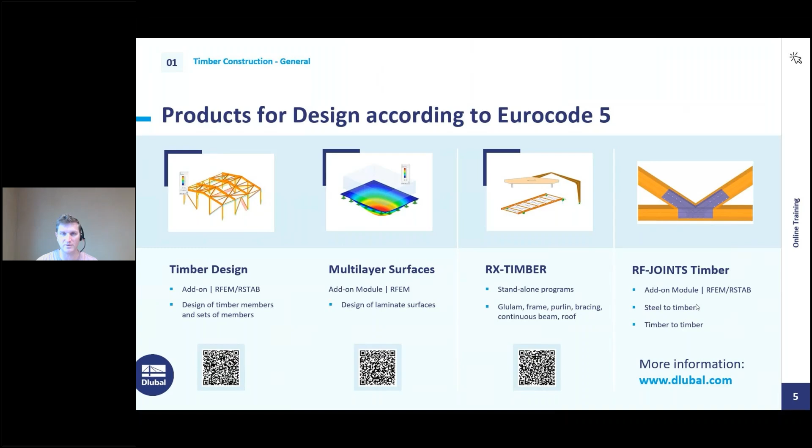And this dowel type connection with steel plates to timber beams, which is available in RFEM 5 only. We try to implement a new philosophy in RFEM 6, which is not available yet, but we are working on it.

Okay, then we can switch over to RFEM 6 and start with our first example. A few words about the presentation: I do not recommend modeling directly, but just watching and then repeating what was shown with the recording, which you will receive afterward in an email. This training actually requires the RFEM 6 student training. If you have not seen it yet, you can watch it later on our website. We will not go into the theory of timber design today; that would go beyond the time frame, and I will leave that to your professors.

Then you see the new model base data dialog. That means we will enter a model name, in this case example 1. We choose the type of model. You can select the 3D type for this example or the 2D XZ plane stress type, which would also work. I'm used to keeping it as 3D, so that's why I select 3D.

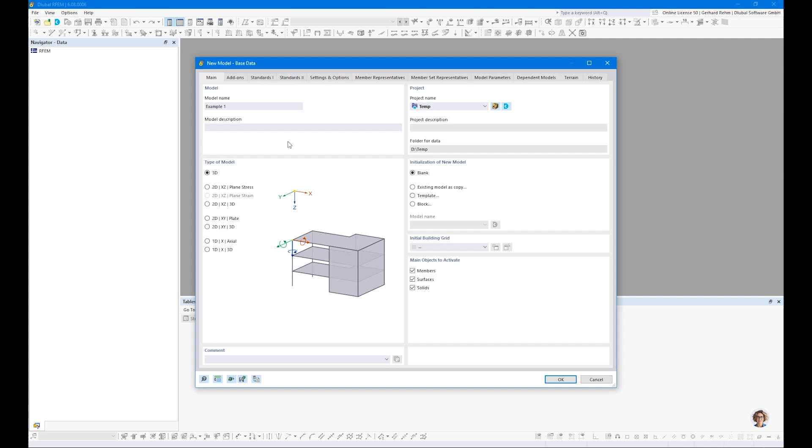Then we go to the add-on tab. Here we can activate the timber design add-on. Here on the bottom you will see the multi-layer surfaces add-on, which was presented here. We do not need any load wizard, so I deactivated this option here. For wind and snow loads, we don't want to generate.

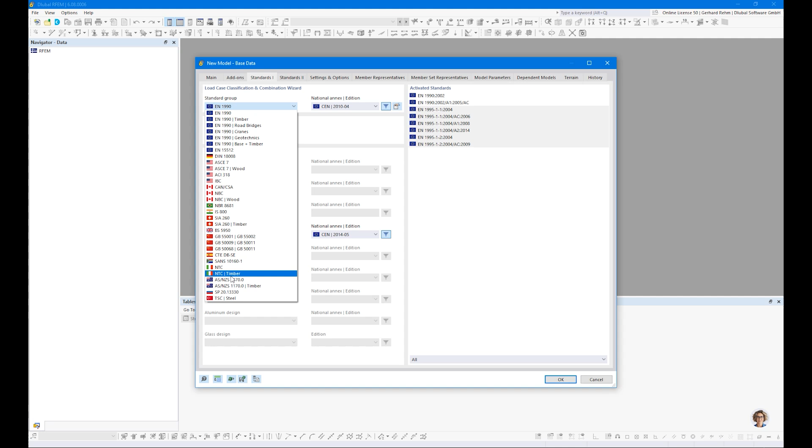Standard group should be changed to the timber-related standard group in this case to consider the correct serviceability limit state load combinations. As you know, we talk about load duration classes, so that's why we need to select always the additional timber standard group, for European standards or US standard, Canadian standard, Italian standard, Australian standard, exactly. So in this presentation I will use the global Eurocode, that's why I do not select any national annex here.

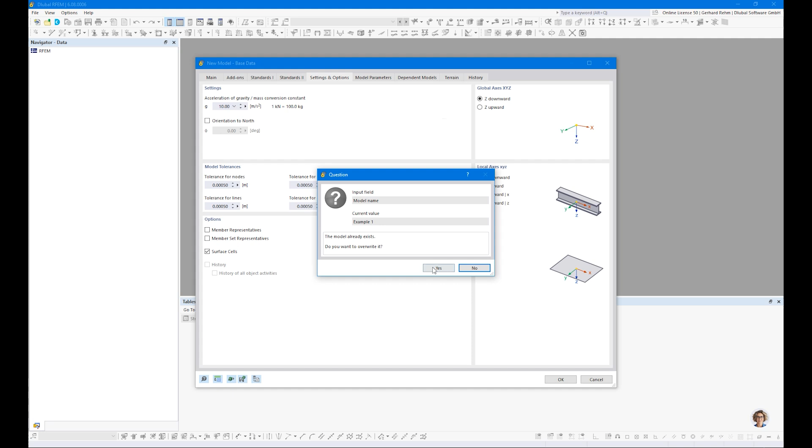Okay, so maybe we can deactivate the member representatives because we model only a few members, that's why we do not need it. Then let's start. You know about all the navigators and the icons, I guess, from this RFEM 6 student training, that's why I will not mention any further things about that. We start creating a new member. I use this icon here on top.

Each member needs a cross-section, so I will create a new cross-section. Maybe before I start, I will delete out all data to start exactly from scratch. So a new member, and we will load a new section from the library.

All these massive one sections can be designed according to Eurocode, SIA, and NTC. The composite sections, massive 2, is still in progress, so it's not available yet in RFEM 6, since we introduce a new philosophy to design composite sections. We do not want to use the gamma method described in Eurocode 5, which is really limited in its usage. We will use a different approach here, and we are working on it.

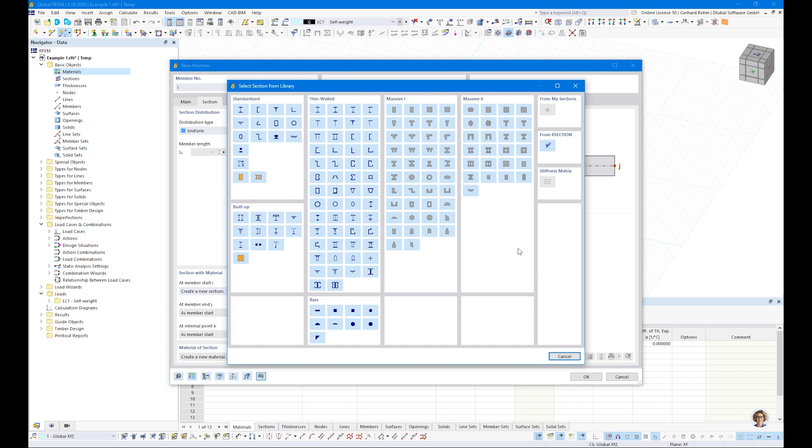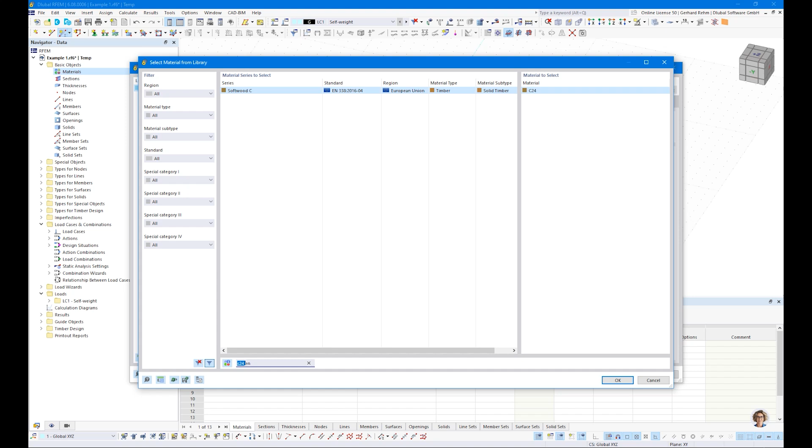Mostly we use our rectangular section. We need a material. We open the material library, and we can use these filters to find the correct material, or we can simply use the search. In this case, I want to use C24 according to European standard. I enter C24 space EN, and I get directly the material I'm looking for.

Okay, then let's go to the geometry. In this case, the width is 120 millimeters and the height is 200 millimeters. If you're interested, you can also check the section properties.

Now the beam is on the cursor. We can start, for example, here in the origin and use this black grid points. I see the unit is still in millimeter. We can change this, so I go to 3 meters, and the next one should be at 4,500 millimeters for the second span. We simply enter 4,500 millimeters and click the enter button, and that's it.

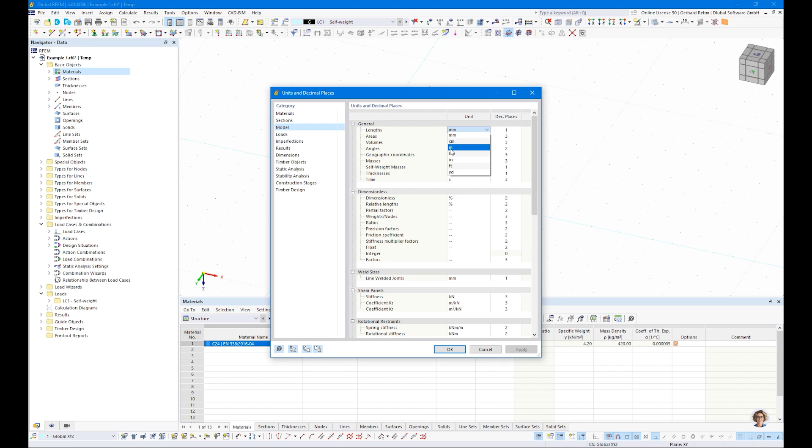Maybe let's switch the units. I changed it in a previous file, that's why it's set to millimeters. I want to use meters here.

So this is our rendered two-span beam. Of course, if you want to check the wireframe model, simply switch to wireframe. This is actually what we use for our analysis.

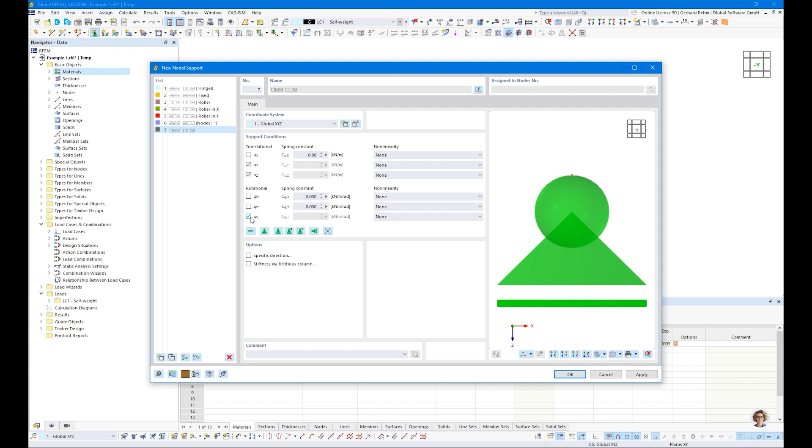So we have this two-span beam here with the beams. Now we add some supports. We will use a fixed hinge support on the left side, and a sliding support at the intermediate support. I create a new support which is sliding in X, and I will apply them on node number 2 and 3.

Okay, so that's it actually. We have already load case 1, which is created as default. This load case 1 considers automatically the self-weight of the beam with factor 1.0. In case you want to calculate some examples from university, mostly they do not calculate the self-weight separately, they add it into the member load directly. In this case, you can simply deactivate this checkbox. You see directly that this load case 1 self-weight is assigned to the action category permanent, that's why we use a load duration permanent here.

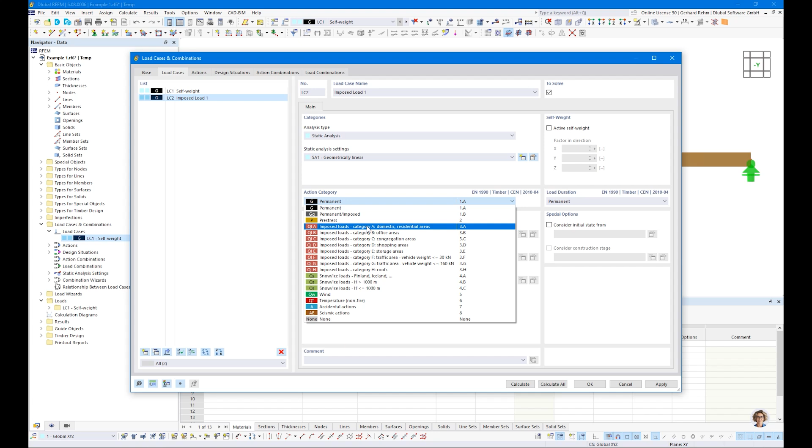We create another load case. In this case, it's imposed load 1 on span 1. The action category we will change to imposed loads category A, and you will see the load duration is changed accordingly. I will create a copy of this load case and change it from span 1 to span 2. That's only a description, you can use whatever you want.

Then let's fill our load cases with loads. In this example, I will add a new member load. Watch out, do not use the line load for members, this will not work, you need to use the member load. Of course, you can also add some nodal loads too, but for our case, we use the member loads. We will apply a member load of 2.5 kilonewton per meter. Click the member 1 and 2 and click OK, and then you will see that the load is created.

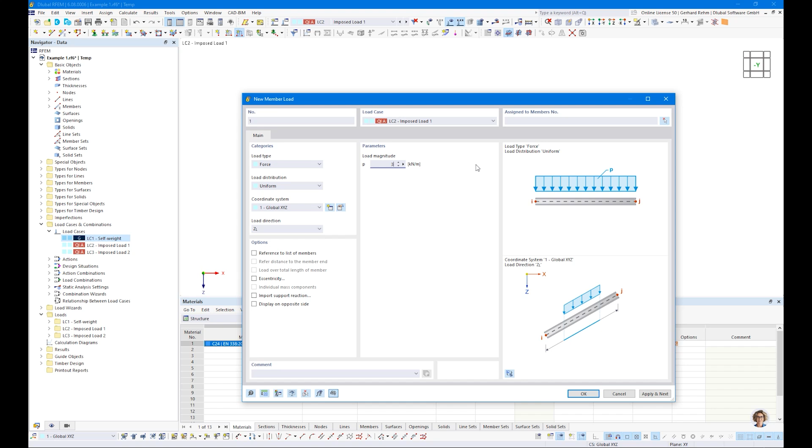Then let's switch over to the imposed load. In this case, we will use 3 kilonewton per meter on the left span, and also in load case 3 on the right span. So we need to check the imposed load separately, we cannot use one load case because the imposed load is a variable load which can act on left, on right, or both at the same time. For example, the biggest deflection we will receive from load case 3, but the biggest bending moment we will get from load case 2 and 3.

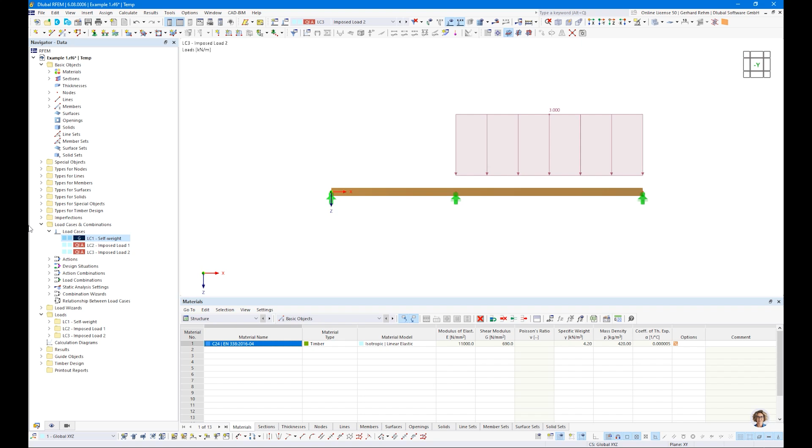So when we check our load combinations, we will see, or maybe we should go to the load cases and combinations dialog first. So we have created our load cases, then we will see what happens to our actions, especially important here for the imposed loads. When we check it, both load cases can act simultaneously.

In case we switch over to alternatively, then both load cases will not be combined. But of course, we want to consider all of them at the same time, meaning simultaneously.

Okay, then let's switch over to design situations. Here we can define which design situation we want to check. Of course, we want to check ULS, meaning permanent and transient. We want to check the characteristic deformation and the quasi-permanent deformation. So it depends on the national annex.

Okay, so what we can also do is change the combination wizard. In this case, the combination wizard is set to second order, but for our example, the geometrically linear analysis, so the first order is absolutely fine.

Okay, then let's check our action combinations. Here we can double check which combinations will be created, and the result are the load combinations. So load combination 1 is only 1.35 times load case 1. Load combination 2 is dead load and imposed load on the first span. Load combination 3 is dead load plus the self-weight dead load plus 1.5 load case 2 plus load case 3, and this one is load case 1 plus load case 3, and so on and so on.

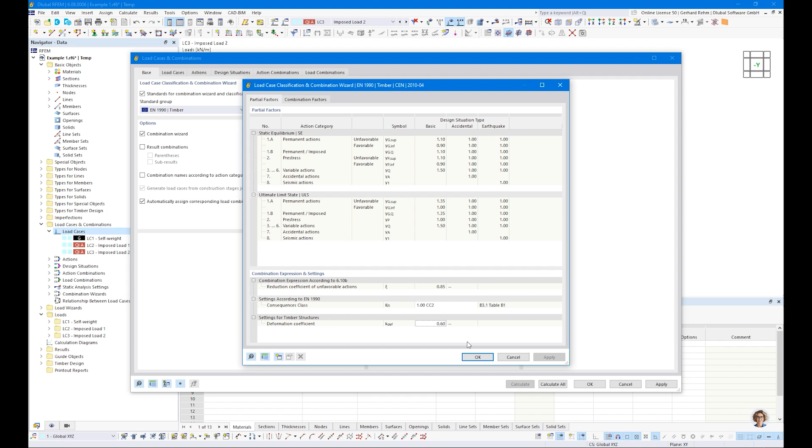So here you see the characteristic deformation with no partial safety factors, and the quasi-permanent combination, which includes also the psi values and the kdef value. The kdef value is described here in this added dialog for the load case classification, and here on the bottom you see which kdef value is used as default, 0.6. This is, I guess, for most national annexes the case, for softwood. Of course, if you have different service classes or different kdef values, you can enter or change the values here for this simplified method to consider creep.

Okay, so that's it actually so far. What we can do now is calculate the load cases and load combinations, so I do that for design situation 1. The design situations include all load combinations as an envelope. So what that means, we can check it here.

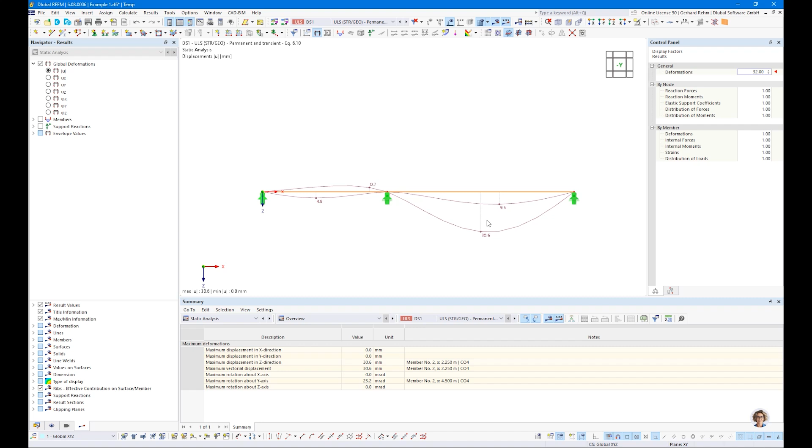So what we see in the beginning is the deformation, with the maximum and the minimum. That means, of course, the minimum deformation will come from that load only, from CO1. So when we check CO1... no, sorry, I guess from CO2 in this case, it's the 9.5 millimeter.

And the maximum one should come from load combination 4, I guess. Yes, so load on the right span. Same for the bending moment, internal forces, My. So the maximum bending moment, the 15.55 kilonewton meter, will definitely come from load combination 3. And that's the case. Okay.

I don't want to go in detail because this was shown at the RFEM 6 training. You receive your deformation, the internal forces, and the support reactions, so I don't want to go into detail for now. So what we do is we focus on timber design today.

That's why I switch over to the timber design add-on. Here I can define what I want to check. Yes, I will check ULS and both SLS checks, and of course, I want to design both beams. So that's the question now.

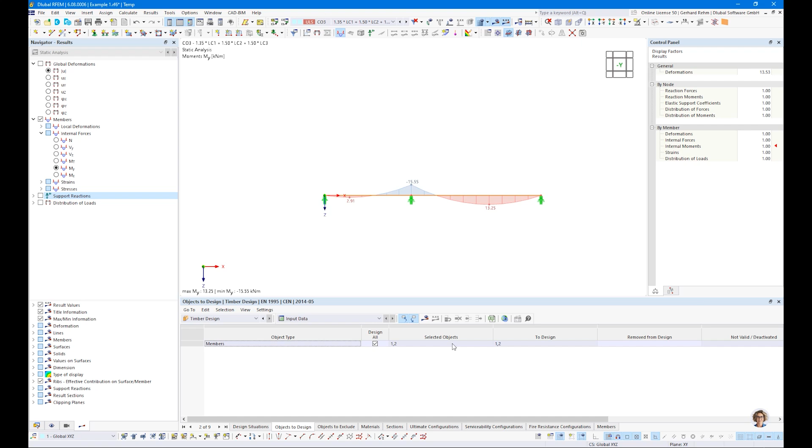Do we want to design the beams separately, or do we want to design it as one beam, one element actually? To do so, we can create a member set. So when we go to members, create member set, you see we can combine the different members to a member set.

And that means we do not design 2 members, but we can design 1 member set. Okay, I click OK. And when we check the member by right-click, member edit, or simply double-click the member, you will see that the design properties are now on the member. There are some additional tabs here because of the design settings. But when we don't want to design any member, simply create a member set and transfer the design properties to this member set. So when we click OK now and go back to the members, you see this member has lost its design property because the design property is assigned to the member set.

Okay, so let's go back to the member set.

And here we can define some additional settings. For example, we can define which service class should be used. We can define some local section reductions. We can define effective lengths, in this example for buckling, but since floor beams are mostly never forced to fail for stability, we do not check stability for this example. We will check stability in example 2 and 3.

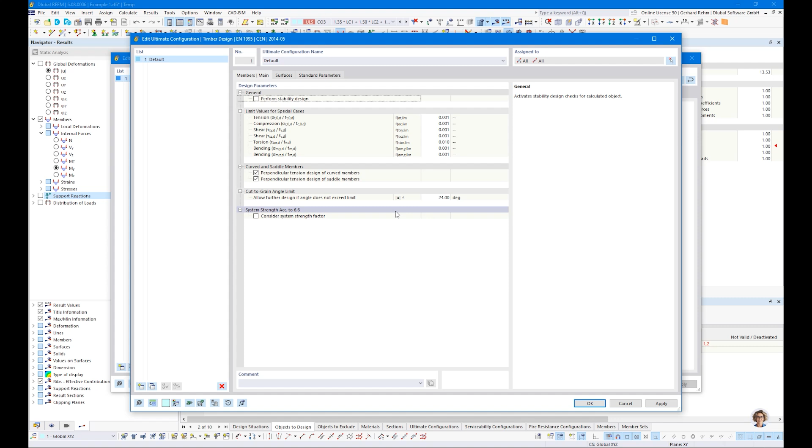Let's check the default setting for the ULS config. When we check it, okay, there is, for example, this option, perform stability design, yes or no. In this example, I do not want to get informed that I miss some input for stability, that's why I deactivate this setting, since I do not want to check it. Okay, there are some further settings for members and for surfaces, and also some standard parameters, which I don't want to mention today in detail.

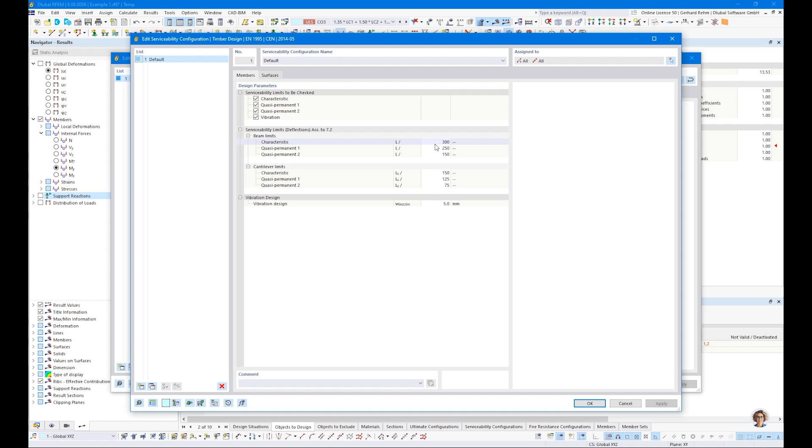Okay, when we check the SLS config, we will see our limits from the standard. It's also dependent on the national annex, of course, but it depends on you actually, so you can define your limits manually. Okay, then let's go to the last tab.

The last tab is about design supports and deflection. Since we do not design the members individually, so member 1 and 2, but the member set, we will see that the reference length for the SLS design is used for 7.50 meters.

Okay, so that means when we check now, when we would leave the setting as it is now, the program would check L over 300, for example, by 7.50 meters over 300. This is of course not correct. So what we need is the segment, the first segment, and the second segment. And how to consider this is by using design supports.

This is design support, so I will create one at member set start. This design support is for the design of pressure perpendicular to the grain, that's option 1, and for option 2 to create the segments for the serviceability design checks.

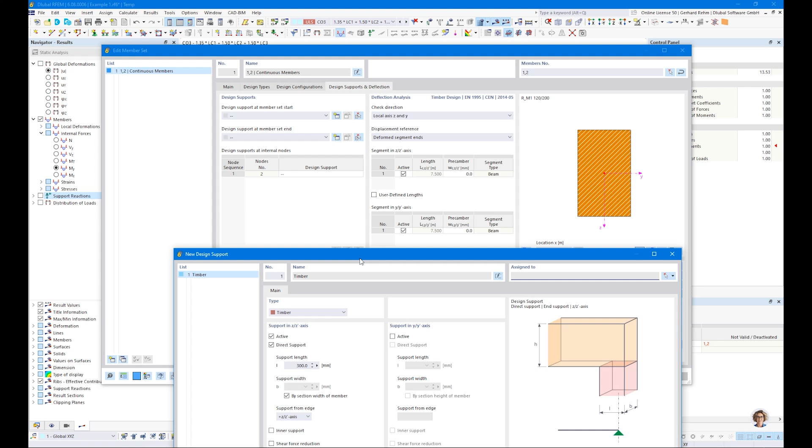Okay, so in this case, we want to consider the support in local Z-axis. So each element, let's go back and check the local axis system of the member. I right-click the member, local axis system of member. Each member has its own axis system, and in this case, we are focused on the Z-axis.

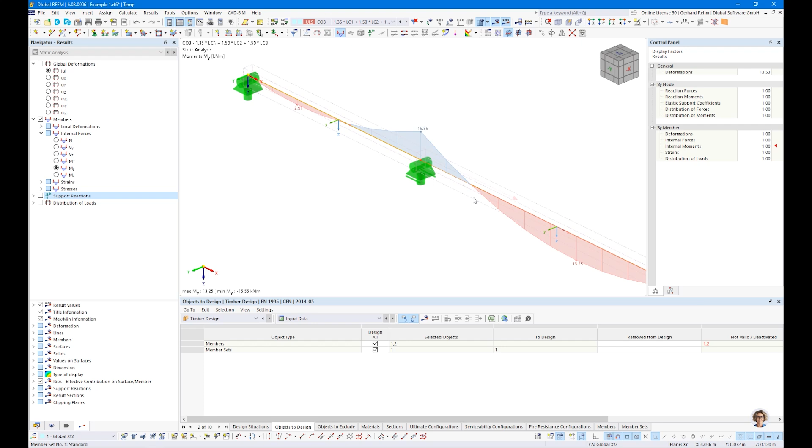So in this case, let's go back to this dialog, create a new design support. Okay, support length should be 60 millimeters here. It should act, or the width should be overtaken from the member. Support width in plus Z direction.

Of course, we can switch to minus Z direction too, but in this case, the Z-axis goes downwards. We want to apply the support at the bottom side. Okay, it's not an inner support, it's a support at the edge.

We could apply some shear force reduction, and we could also apply some reinforcement elements like fully threaded screws. Okay, so for the compression design perpendicular to the grain, we need to introduce this KC90 factor. For softwood and discrete support, we use this factor 1.5. So this is a user input.

We want to consider it for fire design. We don't do any fire design today, but we can leave it on. And yes, we want to consider it for the deflection check. Okay, so I assign this design support to the member start. You will see this icon here on the bottom, or the symbol, and also at member end. You will see the tables are still based on one segment, but now it automatically detects this intermediate node.

And what we will do is we create a new design support here. Length should be 140 millimeters. And in this case, it's an inner support. This information is important because it needs to know if there is the additional 30 millimeters available for the support pressure design check on both sides or only on one side.

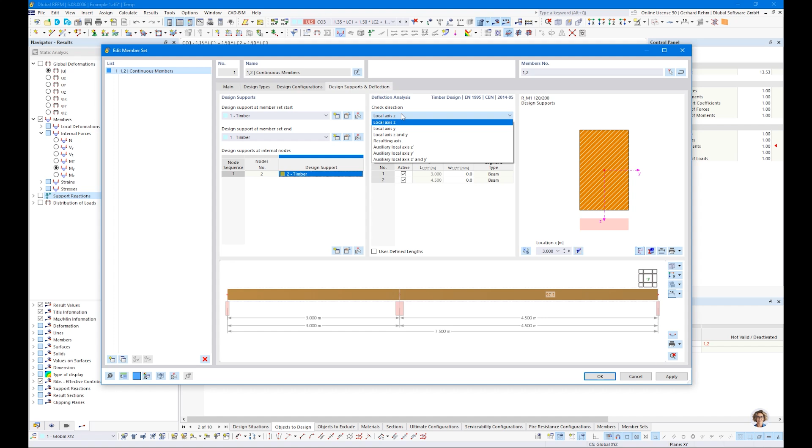Okay, and now you see the table has been changed. Now it detects two spans. One span is 3 meters, the other span 4.50 meters. Okay, so we can switch to local z-axis only because we have no deformation in y direction, but we can also leave it for z and y. It does not matter. Okay, so that's it for this tab.

Then let's go back to the design here on the bottom, for timber design, input data. As you see, member 1 and 2 get invalid because we do not have any design properties on them anymore. That's why we deactivated, and we want to check only member set 1.

Okay, so that's it for the input, and we can simply start the analysis.

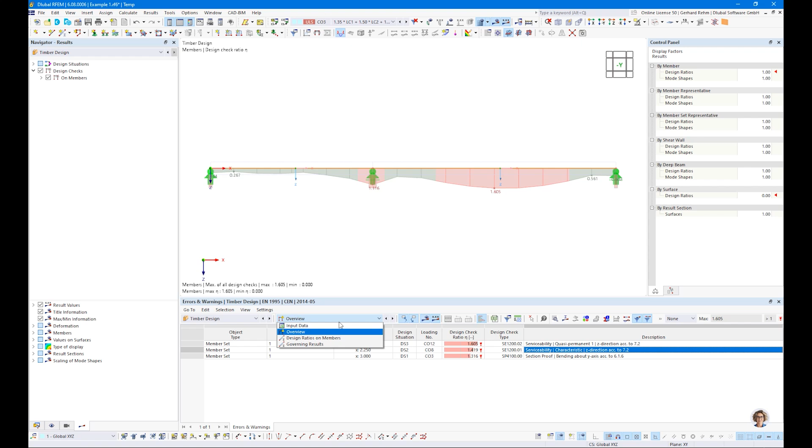So we can switch over to design ratios on members. Here we can see in detail what design checks are not fulfilled. So we have a few 0 values here. We can use this filter to show us everything which is higher than 0.

Okay, so shear is fulfilled. Sorry, not shear - the design of the support, meaning the compression perpendicular to the grain, is fulfilled. The shear is fulfilled, so we have no shear issue here, but bending is not fulfilled.

We can check this here in this table, or we can also check it graphically. Okay, we have different options. The first option is the default option, ratio envelope. It shows us the ratio envelope of all design values.

But we can also switch to selected design checks. In this case, maybe I want to deactivate serviceability. I want to see only the graphical representation of the ratio for ULS or only for SLS.

So here we can prove the plausibility. Yes, the ratio is affine to the deformation. That's fine so far.

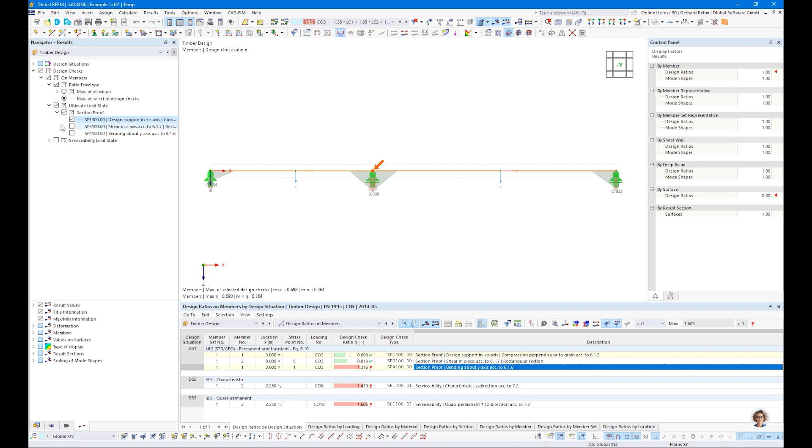Additionally, you can check the results for individual design checks. So for example, here, pure bending or pure shear or pure design support. This helps you to better evaluate the results.

But let's go back to the table results and to the details. In case you are interested in how the design check is done, you can simply double click this design check and you will see what is done here. It's nothing special since we do not check any stability.

We will check the stability later, and then we will see that all equations are listed here. So we do not have a kind of black box like other software. You see each intermediate value, and you will be able to follow your hand calculations with that.

Okay, so in this case, nothing special. We have our K mod dependent on the load. In this case, it's CO3, which of course has included imposed load and load case 1, dead load. That means the K mod value for medium term is 0.8 multiplied by our 24 Newton per square millimeter, divided by the partial safety factor, and you get the allowable stress. The stress divided by the allowable stress gives you the ratio.

That's actually all. But of course, what we can do now is we want to optimize this situation. There are two options to optimize it. You can simply add and change your cross section or your material manually here, or you can also optimize it here.

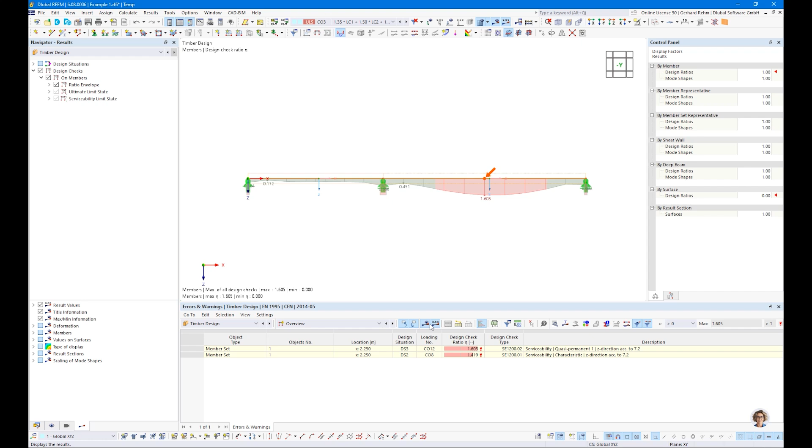So we go in 20 millimeter steps, and then the program tries to fulfill the design checks for ULS design only. Okay, so we see there are still red areas because this is for serviceability. So when we go back and switch to check only ULS, then you will see that the design check is fulfilled for this.

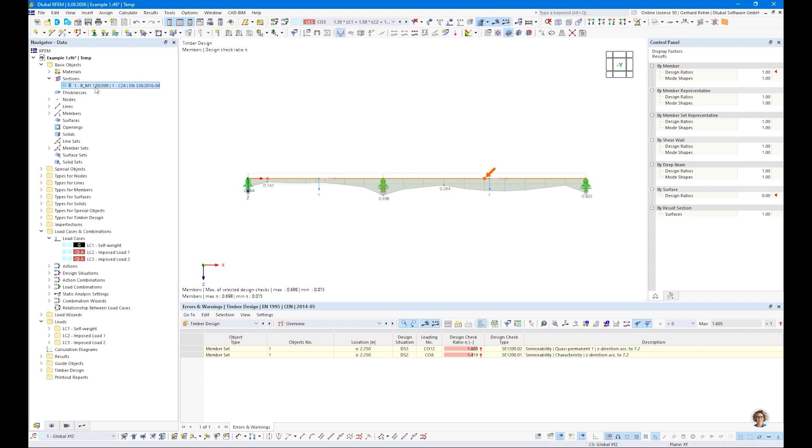Oh, sorry, no, I did a small mistake. Yeah, I realized. Sorry. The optimization - of course the ULS thing was fulfilled before, I guess. That's why we don't see any change here. The problem is only that we cannot optimize according to SLS.

120 by 300. No, sorry, it's all good. Let's check the design ratio. Yeah, it's good, it's good. Sorry. So when we check the design check again, it was optimized to 120 by 300 in this case. Okay, so I'm wondering why we cannot use 120 by 280 - it should also work. So I'm confused why it is not working.

Let's do it manually and double check again. Strange, it works with 280 as well. Let's try it again, maybe I have overseen something. Sorry for that. So we will optimize the height.

We will start with 200 millimeter and go to 300 millimeter in steps of 20 millimeters, so we have all the sections available for optimization. Now let's recalculate - sorry, that was my problem.

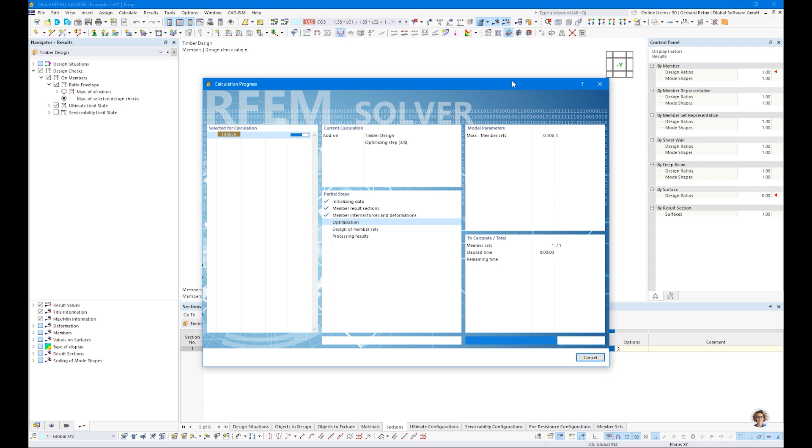We need to calculate the timber design add-on again. Sorry for that, small mistake. Okay, now we see the maximum ratio is 0.9.

And when we check the design ratio, and when we check the input data again, we will see that 120 by 240 is used. Yeah, so that's fine, it works as expected.

Sorry, I forgot to calculate the results again. Yeah, when we add the serviceability design check, we have - sorry, this one was 200 millimeters default. Sorry again. All right, let's calculate the timber design again.

Okay, so now we get the same result as before. We will see, okay, bending design check is not fulfilled.

We can go back to input data and say, okay, optimize from current row, optimize the height.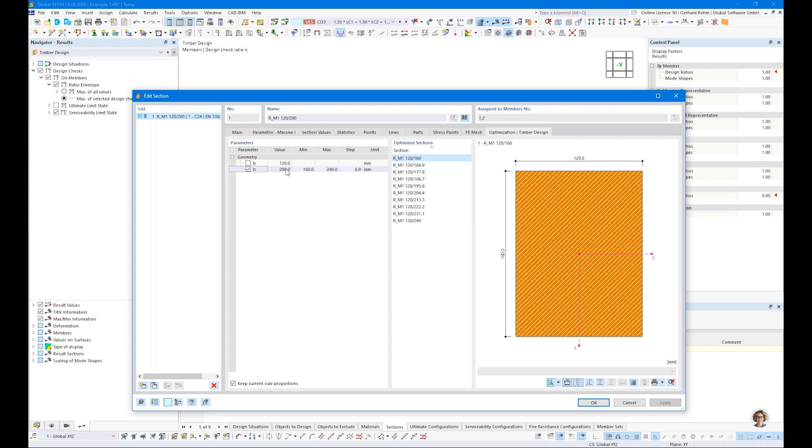We start by 200 and the maximum should be 300 in 20 millimeter steps. So that's it. Click OK, and then we can calculate the result again.

Now we see that the design ratio is now fulfilled for ULS, but not for SLS.

So what we need to do is we need to override this section. So simple right click, use all optimized sections in model.

Then we will see the section will be overwritten, and when we check it again, then we will see the real deformation with the real cross section. So this process has to be done manually.

Okay, so let's check max of all design checks. Perfect. Now we have optimized it, to 95% ratio, which is fine. Okay, so this is our first example.

Let's switch back to our PowerPoint slides, and we will continue with our second example, the flexural buckling.

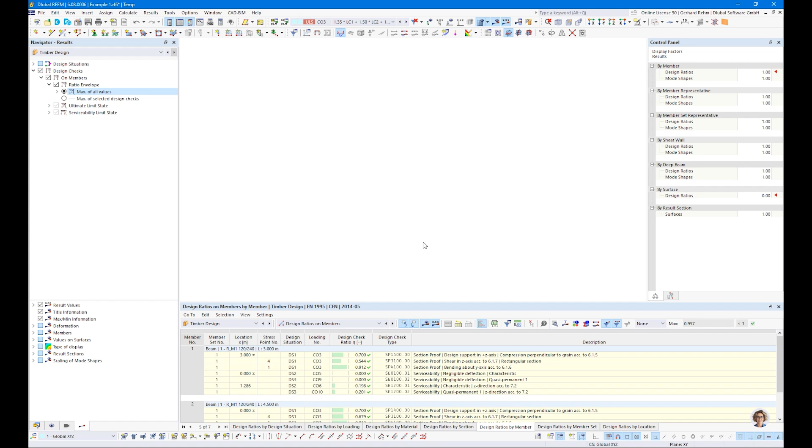Okay, I will create a new file here. So in this case, model name is example 2,

and add-ons we will activate. Again, the timber design add-on, we leave the standard, and we can deactivate the member representatives.

Okay, I will not go in detail like in the first example. So I will skip a few things and I will not mention all settings what I will do.

Or I will not describe in detail every setting what I will do. Okay, so let's switch again, standard group timber.

And now we talk about buckling design. So that means when we consider or when we use a column, of course, this column normally becomes high normal force.

And it can happen that it will happen that not the stress on the member is design giving or controlling, but this column can buckle out of the plane. Depends on the weak or strong axis, of course.

So for this example, we will use a column with a length of 8 meters. So section 120 by 240, this is fine so far. So the length is 4 meters and 4 meters.

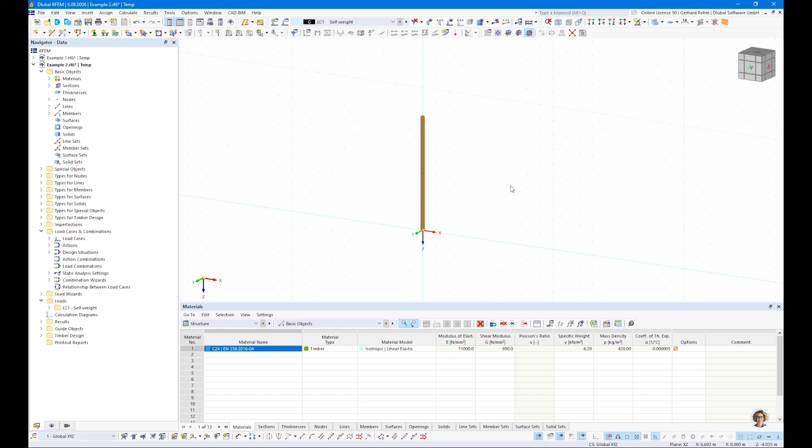We will have, so the we will have the weak axis, which is about Z-axis, and the strong axis, which is about Y-axis.

And about Y-axis, about the strong axis, we will have no restraint considered, and about Z-axis, we will have considered a

restraint here in Y direction.

Okay, so we need some supports on the bottom. Oops, sorry. On the bottom. And a support on top, on column head.

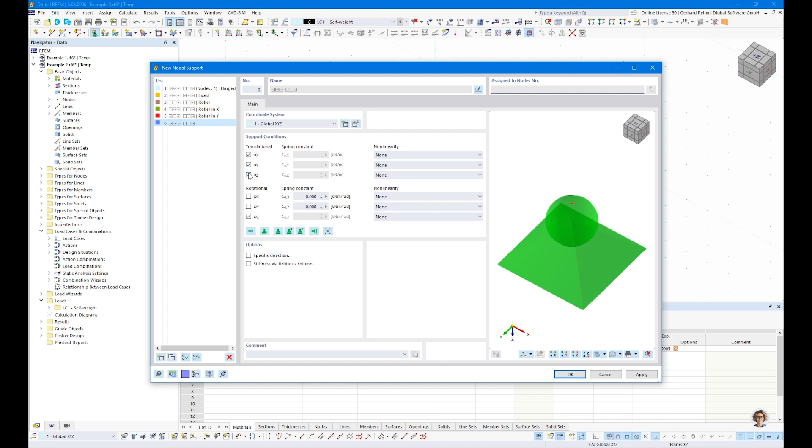So we should consider the support like this so that the normal force or the force can go into the beam.

Okay, here we go. So we will define some nodal load. I use the nodal load here, 35 kilonewton dead load.

Okay, and let's create a new load case for snow load, snow, and we will switch over to this category, smaller than 1000 meters, for example.

It detects short term as load duration, and when we check our load combinations, okay, let's go back to design situations. We do not want to check serviceability in this case, since we have only gravity loads.

We consider only ULS. That means, dead load and dead load plus snow, according to, in this case, first order analysis is okay, since we do only an equivalent member design.

So the Eurocode 5, for example, describes two methods, so the equivalent member design and an approach with second order analysis and imperfections, but we will not do this approach today.

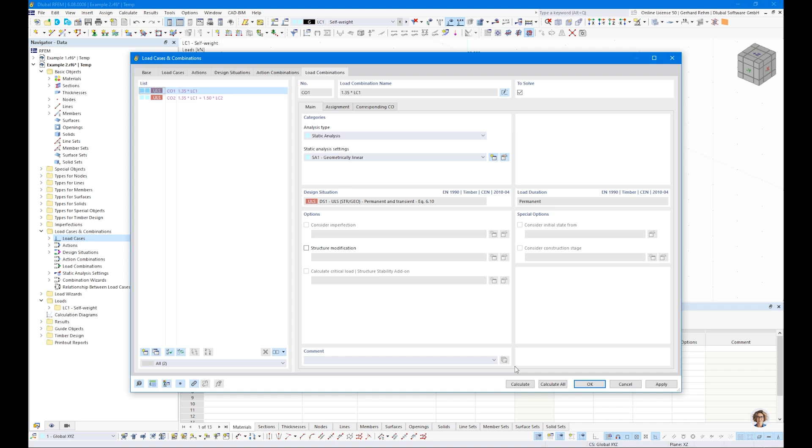We focus on the equivalent member design. Okay, that's actually it. We will fill load case 2 snow load, and we will apply 20 kilonewton of snow

load here on top. I guess I don't have to say anything about the

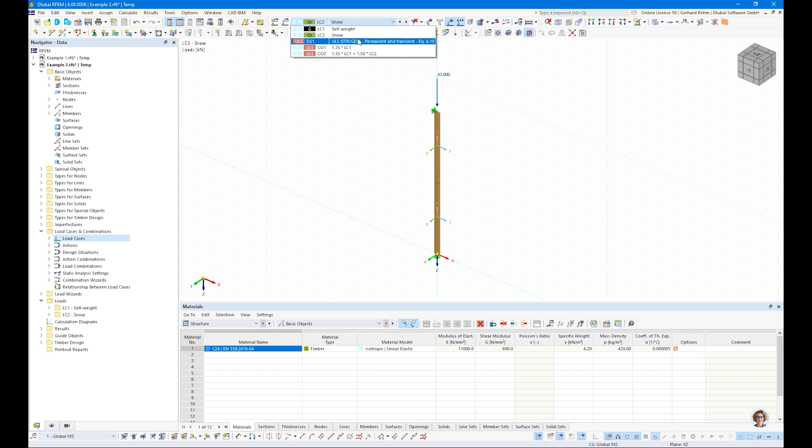results. It's clear. When we check our design situation, we will get the envelope of load case 1, load combination 1 and load combination 2.

So we are interested, of course, in the normal force. You see the top and bottom value differs a bit because of the self-weight of the beam.

So when we go to timber design now and click the calculate button, you will get informed that no effective lengths are assigned and the stability design could not be performed. This is just a warning message. If you're fine with that, because you know this beam will not fail for buckling, you can ignore it. But in our case, it's clear this slender beam will definitely buckle out of plane, so we need to consider this fact.

So when we check the results, we get only one design check, which is a pure section proof, meaning force divided by the area divided by our strength. That's all, nothing special.

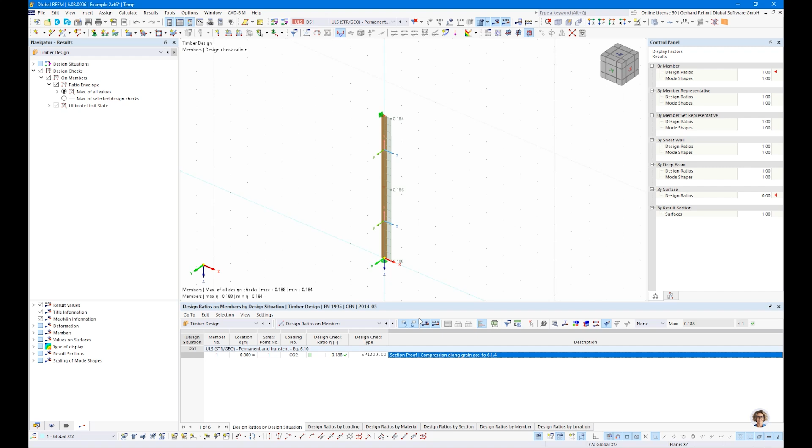But what we want to do is a stability design check according to the equivalent member method. In this case, again, we will create a member set, two members, create member set. We want to overtake the design properties again, and here we define design types. In this case, we need effective lengths.

Here in this tab, we say okay, we want to check flexural buckling about Y and Z axis. Lateral torsional buckling is not an issue - this will be in example number 3. You can leave it on or deactivate the checkbox, it doesn't matter since we have no bending moment on these beams.

Here it's about the effective length factor. In this case, it considers both buckling coefficients about both axes with factor 1.0. But as I said, I want to consider a lateral restraint in Y direction on node number 2. When we check the absolute values, it's 8 meters. For buckling about Y axis, we want to consider 8 meters as buckling length for this Euler case 2, but for buckling about Z axis, we want to consider only 4 meters.

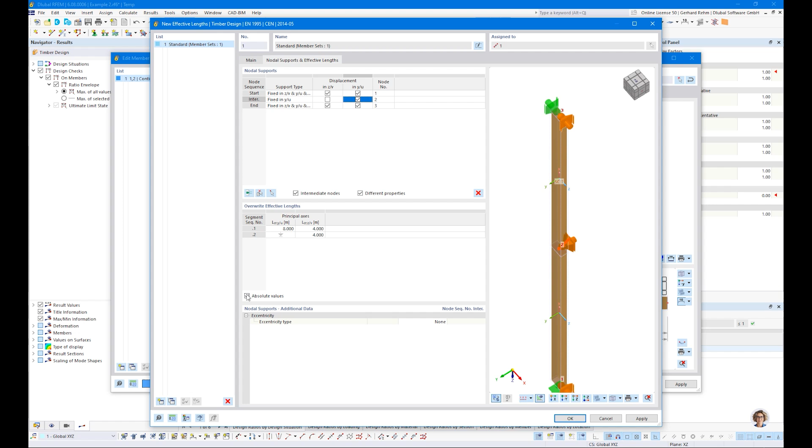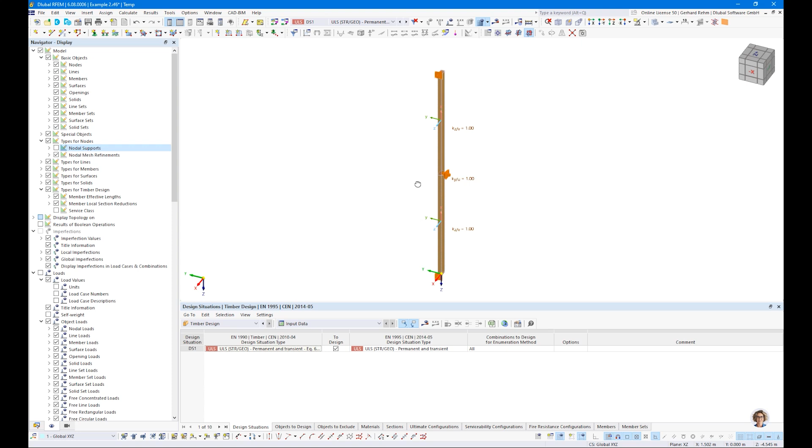Okay, so that's it, we can click OK and OK again. We can also activate this design support in RFEM directly, so we can check them here also. Maybe it's worth deactivating the real supports, the nodal supports, so you see directly which effective length factor is used or which length is used for the V axis, Y, or U axis. It helps you to see how you have to find your bracing or lateral restraints.

Okay, so that's actually it, we can start the analysis again. And we will get this warning message again because I did not deactivate the members. I can ignore it, but I want to do it properly, that's why I deactivated. And then we'll see we get this cross-section design check, and additionally we get this buckling design check.

So let's double check this buckling design check, because now we see all these equations from the standard. First we start with the slenderness. Based on the slenderness, we will get the ratio for the relative slenderness. And with the slenderness, according to the Eurocode, considering imperfections, we calculate this reduction factor Kc. So it's actually nothing else than reducing the cross-section section-proof design check by this Kc factor, in this case 0.23.

That means when I multiply this ratio 0.801 by 0.23, I get exactly this ratio of 18% or 19%. So you're able to follow each intermediate value, so you can compare it with the hand calculation. That should help a lot in proving the results.

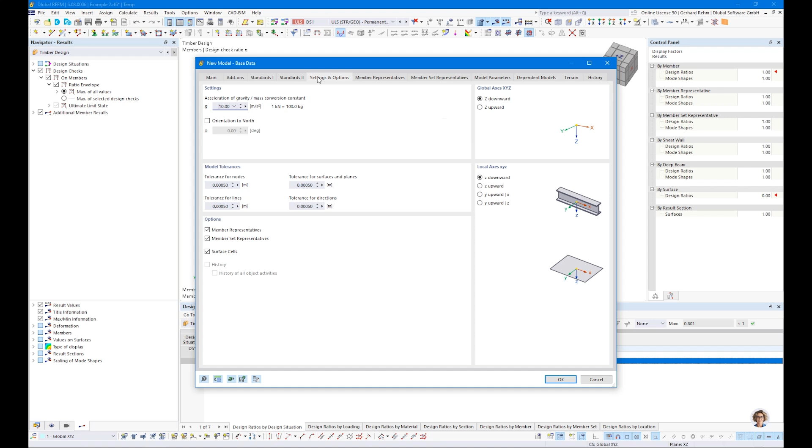Okay, new file. Example 3. Timber standard, we do not need any representatives. Okay.

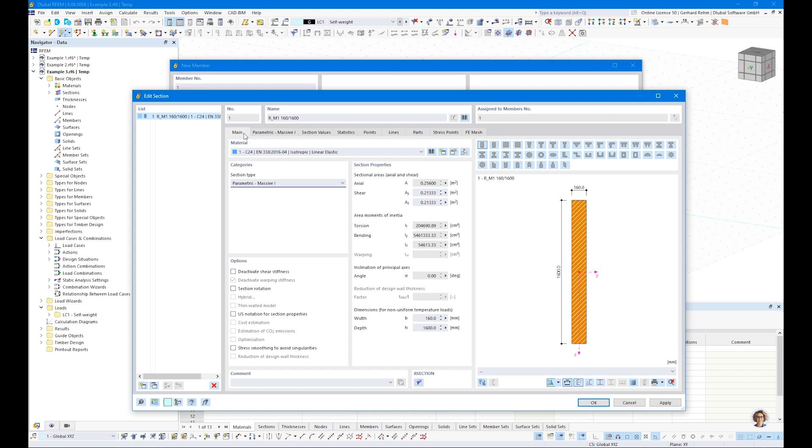We start with a new cross section, in this case 160 millimeters by 1600 millimeters. Of course, we cannot make this high beam with C24. We need to change the material to GL24h, for example, a Dlubal material. Okay, that's it.

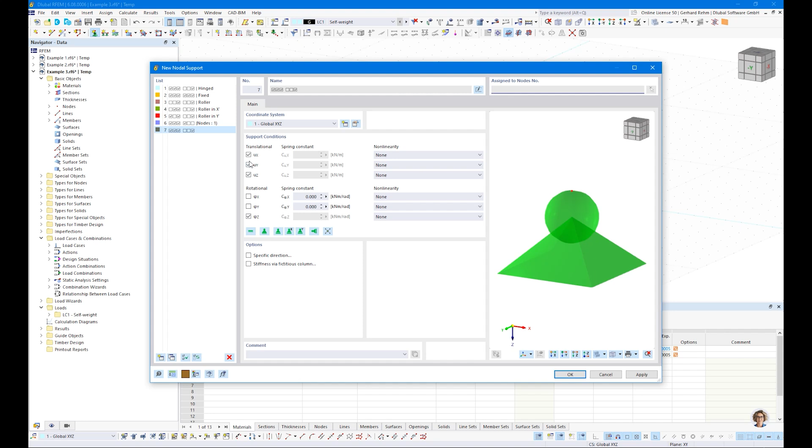So the beam length should be 18 meters, like this. And we will have a fixed support on the left side, and then a sliding support on the right side. Of course, we could also use the fixed one here because we do not have any axial loads, so therefore it does not matter. We have no normal force here.

With the slider here, we can increase the size of the supports. We will check everything with that load, and we will not add any further load cases, since in timber design the ratio is always dependent on the load duration class. In case of high self weight and, for example, low snow, then snow is not controlling but pure self weight. So we will not add further loads.

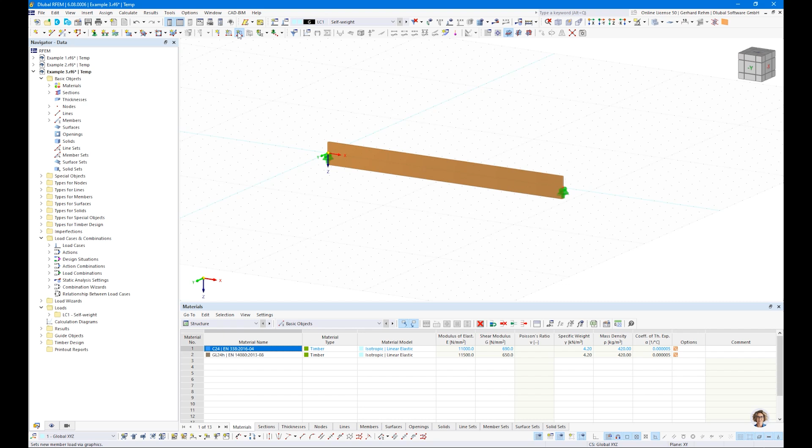So I will add a load here. For example, let's start with 8 kilonewton per meter on this girder, and let's see what's happening.

Of course, when we run the analysis now, we will get this warning message: you have not defined any effective lengths, no stability is checked. And of course, we want to check stability, because when we check ULS and SLS, the design check section proof is 63%. Actually it's good, but we need to know what is happening with this upper chord in this example. That's why we need to define an effective length here.

We do not check flexural buckling, that's why I deactivated it. Since we have no normal force, you can also leave it activated. Here I want to check lateral torsional buckling. We have three options to check it, because for lateral torsional buckling we need to know the critical moment or the critical stress, and based on this critical stress we can check the equivalent member method.

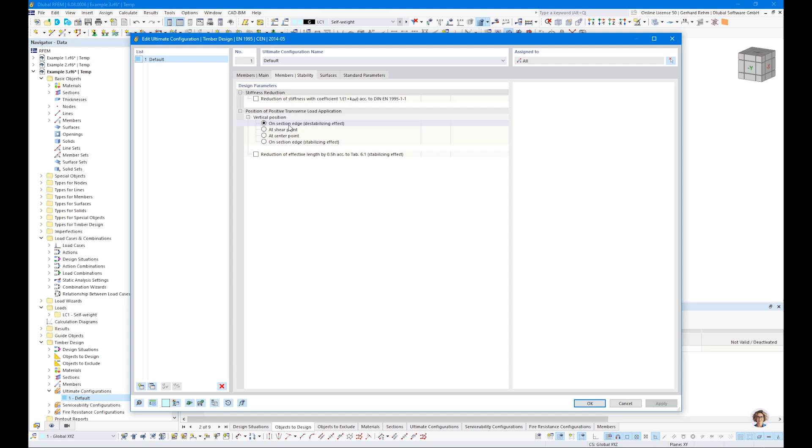Let's go to the ULS settings and to member stability. Here we can double check where we have applied the load. In this case, the load is applied on top flange, on top side. Of course it has an effect when the load is acting on top side — it is more critical than when the load is applied on the shear center or maybe on the bottom side.

In the equivalent member design method, we simply modify the buckling length with 2 times the h, which is described in this table in chapter 6.3.3 in the Eurocode.

All right, we can start the calculation. And of course, you will see — maybe I will deactivate SLS, I'm not interested in SLS, that's why I delete these checks and focus on ULS only.

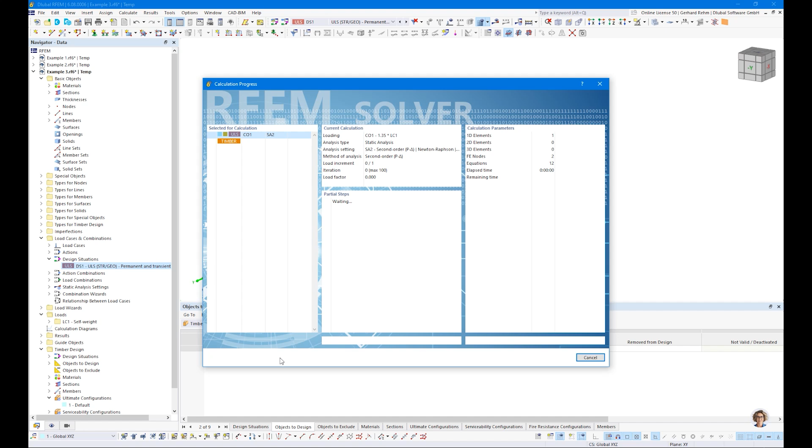And you see, okay, the design check is not fulfilled anymore. Let's double check the design check.

So we see, okay, this is our allowable strength, and we see this equation which comes from the Eurocode to determine the critical stress. We have some factors here: stiffness, the 5% quantile values for E modulus and shear modulus, torsional constant, and the buckling length. So we have 18 meters beam length multiplied by 0.9, which was 16.2, plus, since the load is applied on the top side, plus 2 times 1.6 meters, equals 19.4 meters. We calculate again the slenderness, and due to the approach of the Eurocode, we will get this reduction factor. So we modify, or we multiply, our stress design check — in this case the 63% — we multiply, in this case, 0.63.

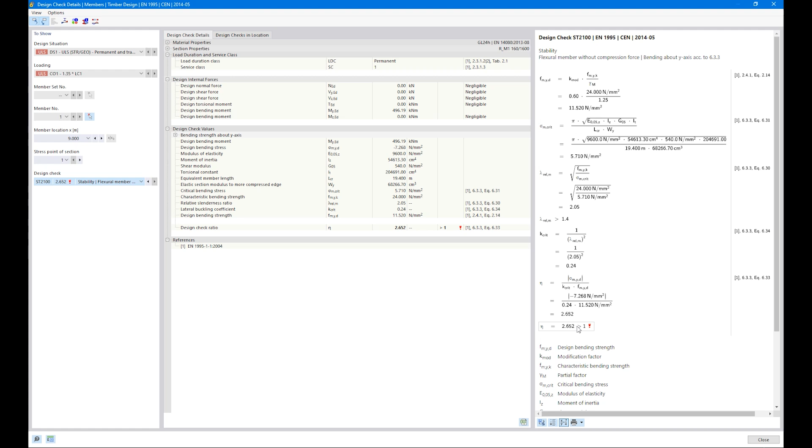In this case, we need to divide it. 0.63 divided by 0.24 equals 2.65. Yeah, and this is exactly what we get. So that means without any restraint, we will not get a fulfilled design check. And in this example, of course, you mostly never have any 18-meter long beam without any restraint. Normally, there's some bracing at the other sides and some beams added to this beam which supports it. Yeah, and this effect we want to consider.

Maybe we will do the same first with the eigenvalue solver. I can maybe directly create a copy, including the load. And for this beam, I will switch over to the eigenvalue solver. I create a new effective length where I check LTB by using the eigenvalue solver.

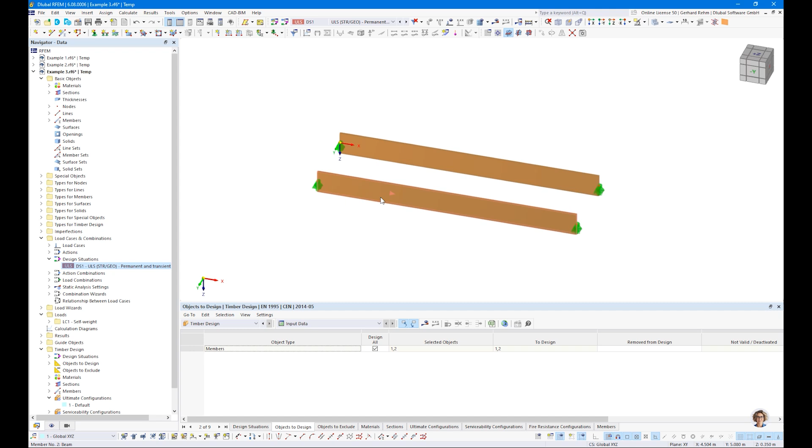Okay, so now we have two beams. One beam is checked with the analytical approach. The second one is considered by the eigenvalue approach. Okay, let's check the results. They should be quite similar, should not differ so much.

So in this case, we have 2.46 compared to 2.65. The result is the effective length here, which was considered on the safe side. So normally the buckling length is a bit smaller, but the Eurocode 5 uses simplifications. It's not exactly factor 0.9, but in reality it should be factor 0.885, for example. And also by adding 2 times the beam height it is not perfectly correct. That's why we have different approaches.

If you would use the German approach from the German annex, you would get a smaller buckling length, and then this one should be nearly, or should be the same. Yeah.

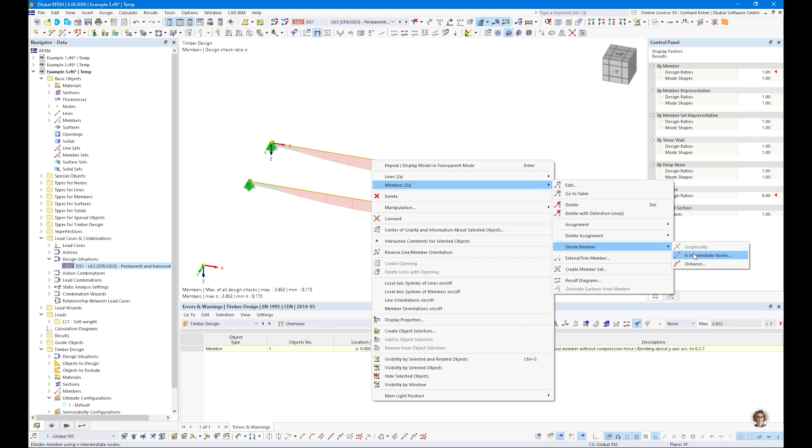Okay. We should solve the problem, and what I do is we will add some restraints here for the buckling method. So let's do it. For both cases, we divide the members and add some intermediate nodes. I will add 2 intermediate nodes, but I will not divide the member. I create nodes on member. That's also possible, I do not have to divide always the members.

So I have this node on members. When we double check it, it's not a standard node, but a node on member. And what I will do is I will modify the buckling length. So in this case, we want to consider intermediate nodes, restrained in Y direction, and all elements can be considered now with factor 1, since we have nearly a constant moment distribution in between the center of the beam. So that's why I use 1.0 here.

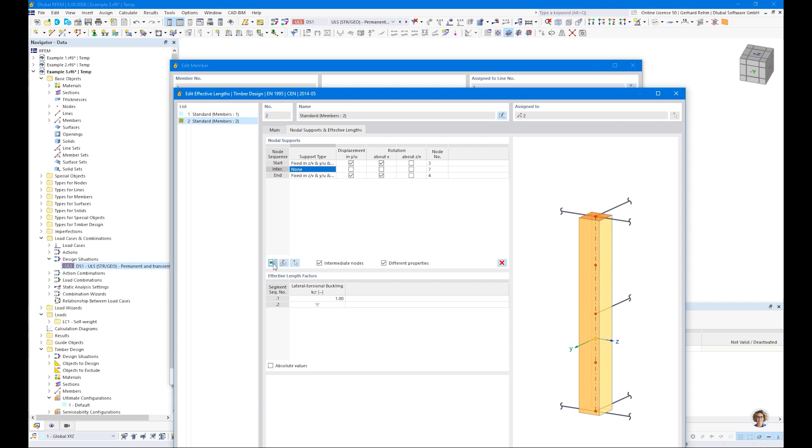This is also common in practice, and for that, of course, it's a simplification. Yeah, it's not exact. A better result you will get with this eigenvalue solver. And here I do the same. I insert again these lateral restraints, and in this example the lateral restraints should be applied here on top side.

So maybe switch over to the real view. So we have this brown colored supports which act at the shear center at the moment, but we will change this to the upper flange, and this setting will be sent to our eigenvalue solver. Yeah. Okay, now let's compare the result again.

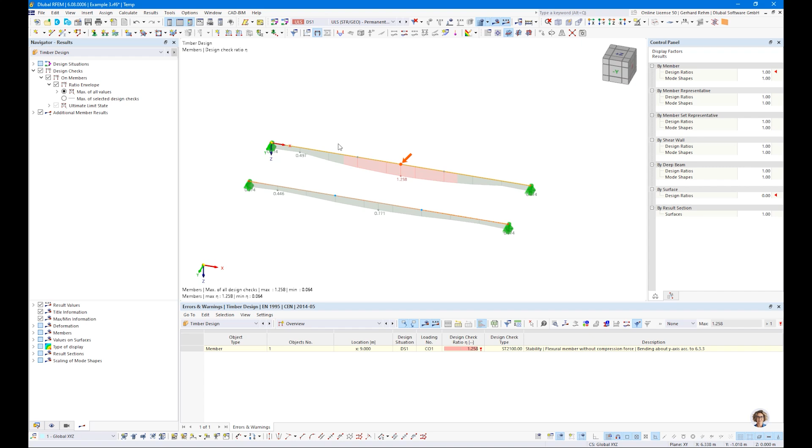Okay, and you will see that the eigenvalue solver shows us a result which is fine, but not the equivalent member design method by using this analytical equation. Yeah, this approach is too much on the safe side. We should use lower, smaller buckling lengths in this case.

So let's double check it. So we have 9 meter 20 in this case. It's nothing else but dividing 18 by factor... we have 3 spans in this case, 6 plus 2 times 1.6 meters equals 9.2 meters.

So maybe this approach is not correct. The buckling length in reality is smaller. But we do not focus on this method. We focus on this eigenvalue solver method because it gives us better results. Yeah, so let's check it.

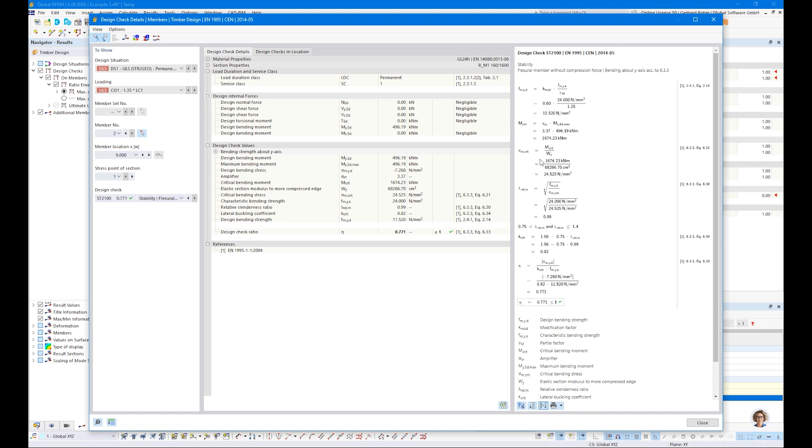When we double click the design check, we do not see this equation to determine the critical stress analytically. We do it with this eigenvalue solver. And from the eigenvalue solver, we receive this alpha critical factor. Multiplying this critical factor by the bending moment from this load combination, we will get our critical bending moment, and we can calculate our critical stress accordingly. Okay.

Yeah, that's it so far. Maybe additional info - you can see here these additional results, mode shapes. So when you see it, this is the mode shape which is considered.

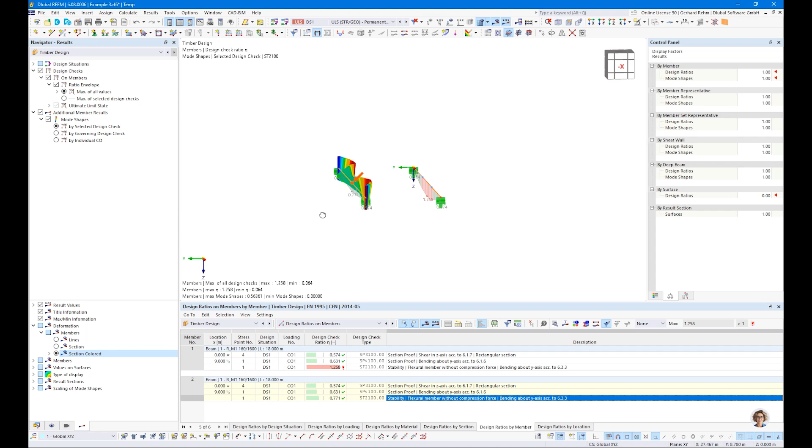Maybe we can switch over to the colored distribution, and here you can perfectly see how this upper flange is failing out of the plane. You see these areas here are restrained. We will have no deformations here at this location on the top chord.

And this is, in my opinion, the best way to consider these buckling effects. Of course, if it's clear, if it's a one-span beam with simple restraints and so on, the analytical equation gives good results as well and can be used. But in more complex systems, I recommend using this eigenvalue solver to detect this critical bending moment or stress.

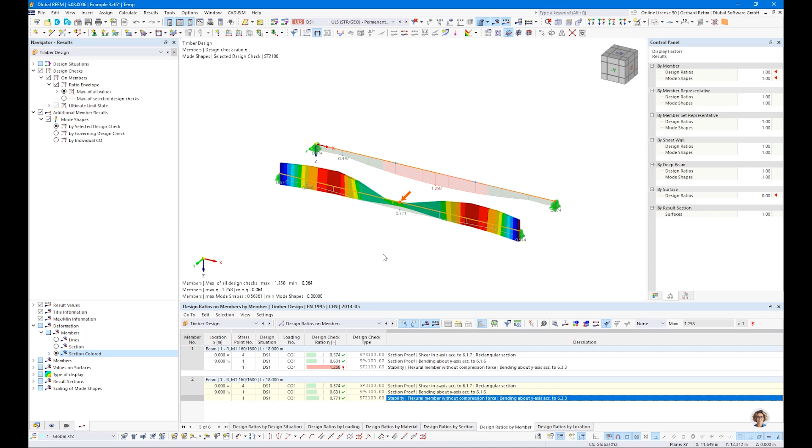Okay, then that's it so far, and we will switch over to our last example. So we are leaving the beam design and switching over to surface design.

Okay, again we need a new file. Example 4, and here for add-ons, we activate this multi-layer add-on. We activate timber design, we switch over to the timber standard, and that's it - we can create this file.

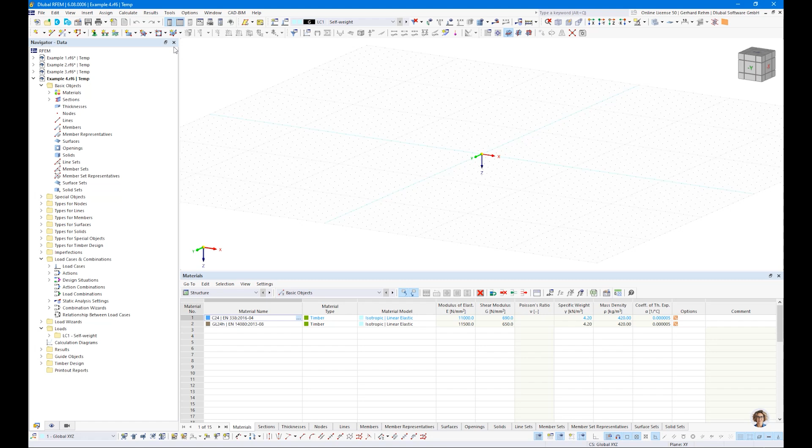Now you should know that CLT design in RFEM is not based on member design, but on surface design. It brings you many advantages, such as individual shapes - you can consider openings in the CLT panel and so on. Today we will do a simple CLT slab, 1 meter by 8 meters.

We create a new rectangular surface, and same like for members, we need a geometry. In this case, we need a thickness. We create a new thickness, and we will switch to layers.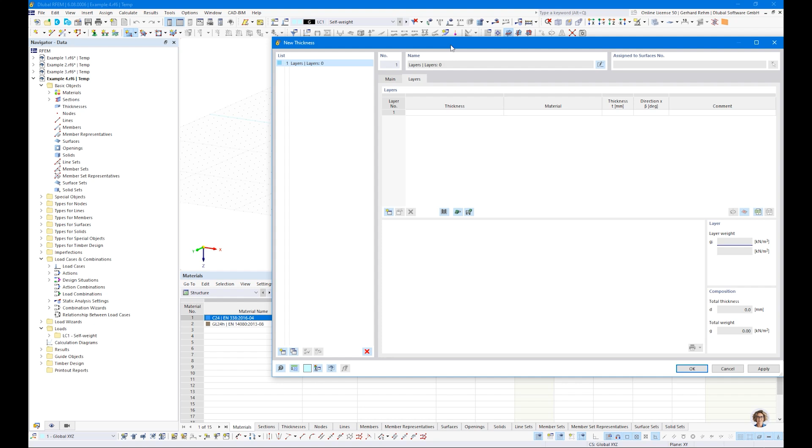So here we can define our composition manually from the material library, or we can simply load compositions from the producers. We have different countries or different producers from different countries implemented. In this case, I will use Binderholz producer, 140 millimeter 5-layered CLT panel.

Okay, so when we overtake the settings, you will see the type comes from library. This is the material which is used, this is the thickness which is used, and this is the orthotropic direction which is used. This means the first layer is orientated in 0-degree direction, the second layer in 90-degree direction, and so on.

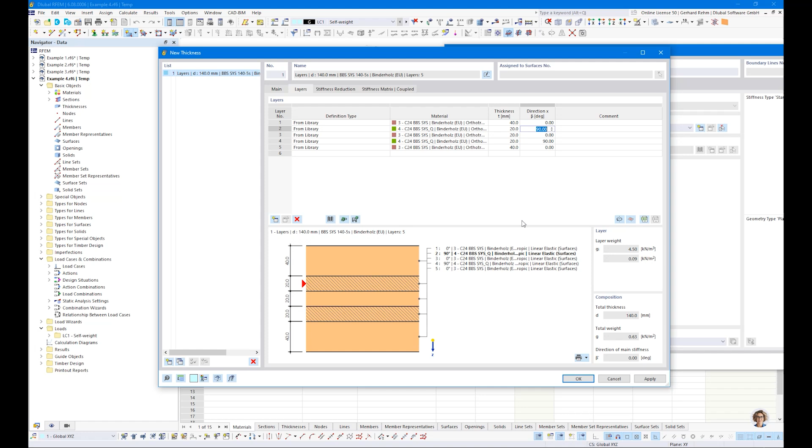Let's create a surface and check out the orientation. So 1 by 8 meters, I'm using the grid points. And when we check the local axis system, you will see, as I explained, the 0-degree direction is orientated parallel to the local x-axis of the surface.

We can also show the layers here at surfaces layer directions. For example, with indices, you will see layer 1, 3, 5 is orientated in this direction, layer 2 and 4 in this direction. Or, for example, as resultant - and this gives you the span direction of the CLT.

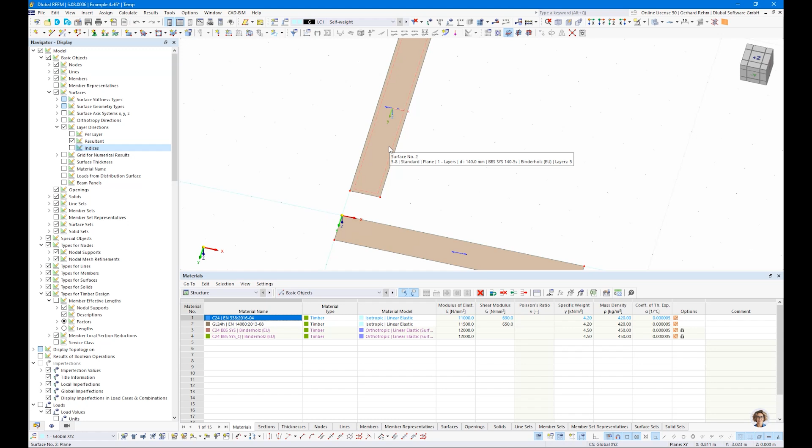But of course, if you would model the surface like this, in this case I don't want to consider the orientation like that. What you can do is create a new composition where you rotate the 0 and 90-degree direction, going inside, creating a copy, and then changing this to 90, 0, 90, 0, and so on. But I don't want to do it.

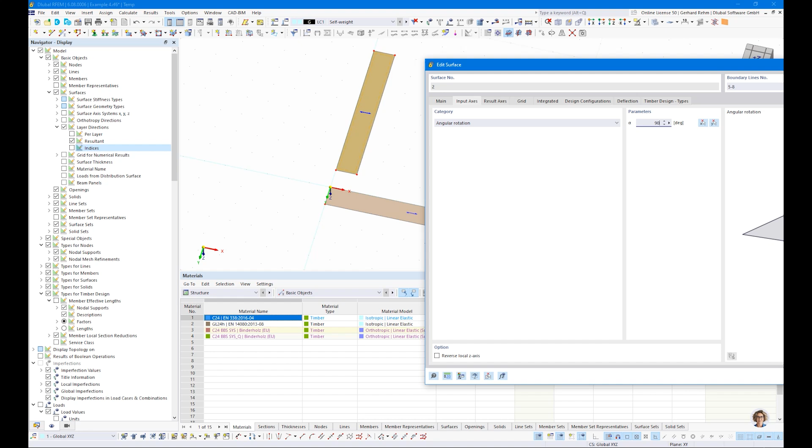It's much smarter to rotate the specific axis of the surface by, for example, 90 degrees. All right, this is how you can control the orientation of your CLT.

Okay, I will add the supports to the structure. In this case, we use simple pin supports. Maybe we can reduce this to see, okay, it's not a nodal support, it's a line support - it supports the whole line here.

Okay, and now we need to define loading. We need again load cases for the imposed load for this floor - imposed load category A, create a copy, and for span 2.

Okay, we will feed the load cases now by loads. So we will consider 2.5 kilonewton per square meter for the self-weight.

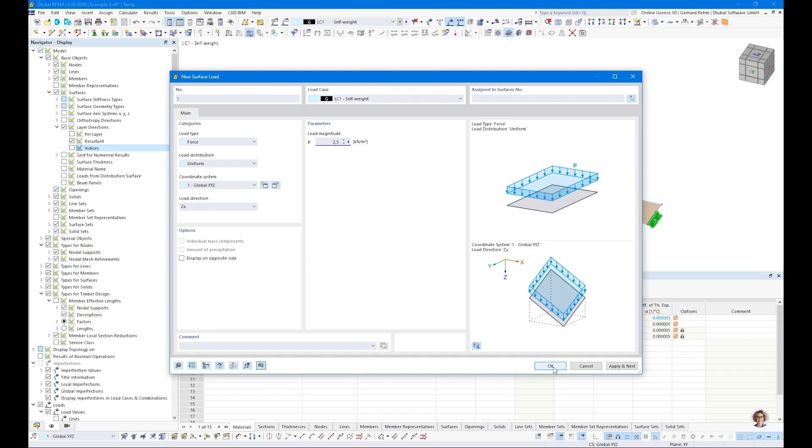And for the imposed load, yeah, we did not divide the surface here - we have one surface. So in this case, we cannot use the surface load, but we can use here our free rectangular load. And this free rectangular load is independent of the surface geometry, so we will apply this load here on surface 1.

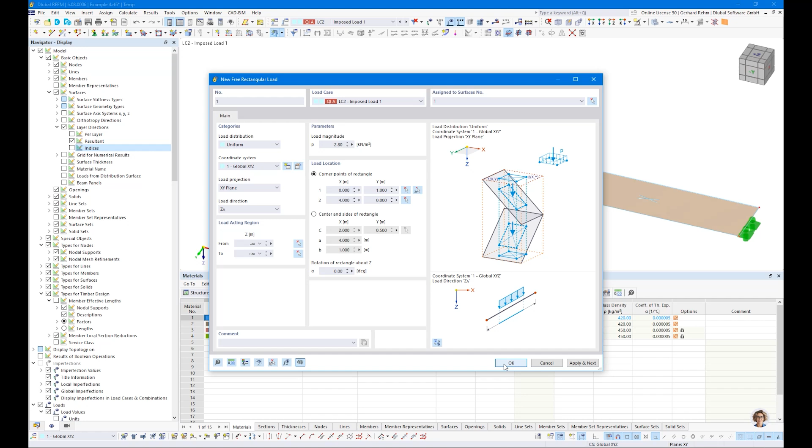Magnitude should be 2.8 kilonewton per square meter, and the area should be defined here by these 2 nodes. Okay, and now we see the load is applied only here on the left side, on the left span. We copy the load by Control C, insert the load by Control V, and we will get the load, and simply modify the load position.

Yeah, and that's it. When we talk about FEA, you should know about FE mesh, about meshing - again, something I cannot explain in detail today. When we create the FE mesh, you will see the default setting is 0.5 meter.

This is the default setting. In general, we recommend considering at least 3 elements over the width, up to 5, 6, 7, 8 elements. There is no common answer - it depends always on your geometry. That's why I will change this to 0.2 meters in this case.

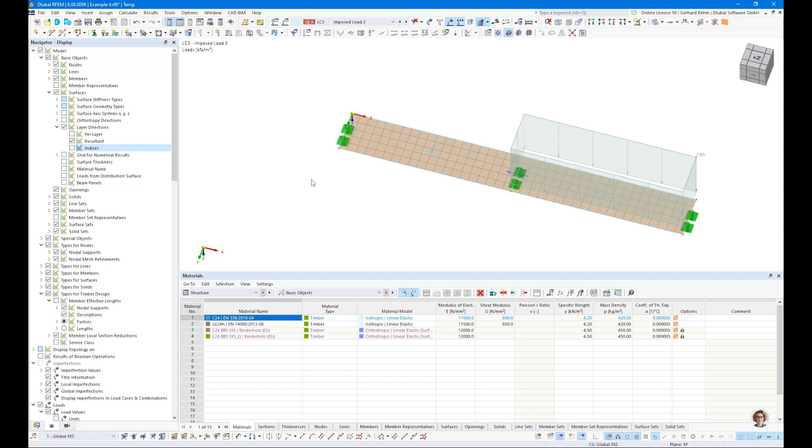Consider the fact that the finer the FE mesh, the longer the calculation takes. For bigger structures, please think about what FE mesh size you use. You can redefine locally as well, so it's not about the global setting always, but maybe simply refine only specific surfaces.

Double click the surface, mesh refinement. You can activate it here and create a mesh refinement for specific surfaces, for specific lines, or for specific nodes. Okay, that's it so far. Let's run the analysis.

Let's check the top view. You will see here there are some really small values we are not interested in. That's why I define a filter: enter 0.01, and show everything which is higher than 0.01. What we see is we get shear in the YZ plane, which is our rolling shear.

We check our transversal shear in the XZ plane. We check the bending, and we check the deformation for characteristic and for quasi-permanent. Additionally, we can check it again here with our ratio envelope.

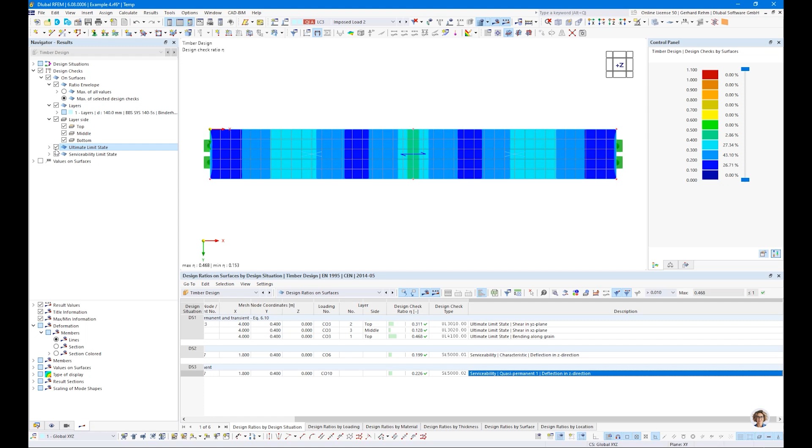If you're interested in the ratio envelope, keep the setting, and here you can define your own settings. So maybe only ULS or only SLS, or only a specific design check, only a specific layer side, or only a specific layer material. Or you can deactivate the ratio envelope and then you have only these checkboxes where you can check only one result. I'm not interested in this, I'm interested in the ratio envelope here.

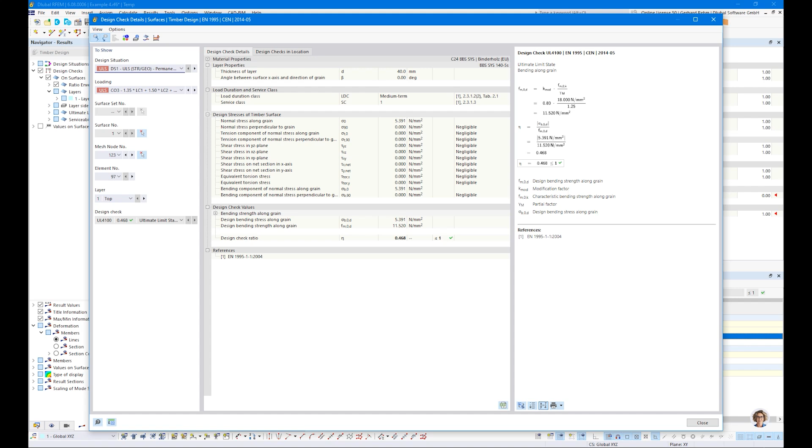Let's check a design check. Double click the design check and you will see what's happening. Nothing special. We receive the stresses directly from the solver, so they are not calculated by some analytical equations. They come directly from our solver, and we compare our stresses from each layer side to the limit stress. Nothing special.

To check the results, you can either check the stresses directly in RFEM by switching to the static analysis. Here you can, for example, say I want to consider layer side top, and let's check, for example, elastic stress component bending on the top side, and you will see the stress component: 5.4 Newton per square millimeter.

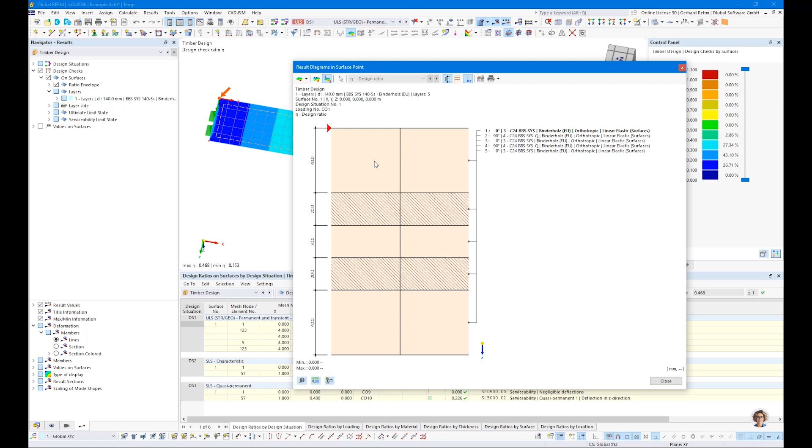There's also this other option in the add-on. You can open this result dialog where you can simply switch to design ratio. The design ratio here is extremely small. Maybe it's worth going to this location where you can see the design ratio over the layers, or the stresses. Again, here you can see the stress on the transversal layers or on the longitudinal layers. Since the transversal layers have no stiffness in the y direction, of course they cannot cover any stress for bending.

Okay, for bending and also for shear, that's the typical shear stress distribution for CLT, and also tau YZ, which is our rolling shear stress. So this is how you can evaluate the results for CLT.

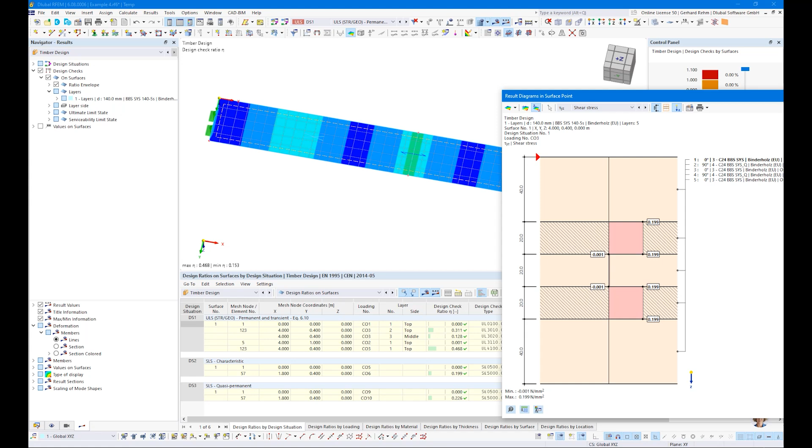Of course, there would be much more to say, but time is running really quickly already, and the hour is already over. I will leave this for now, and of course there are much more things to talk about. I will forward you to our webinars on our website.